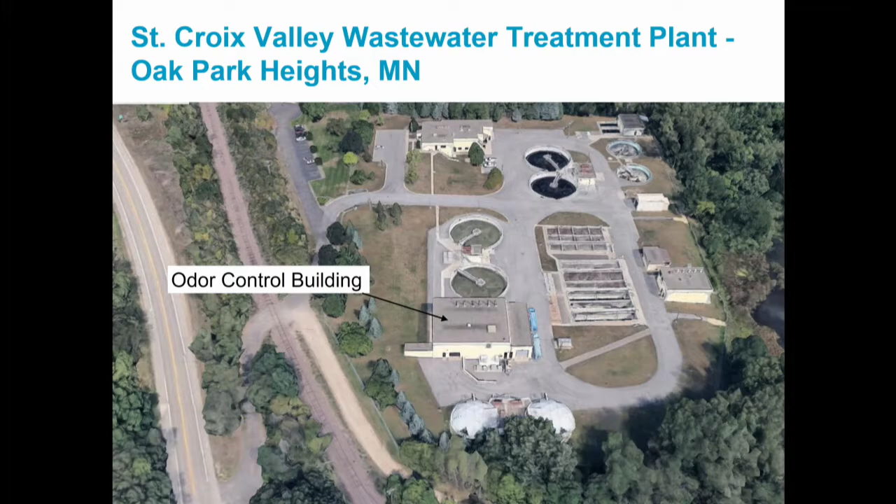A fire occurred January 7th, 2018 at the St. Croix Valley wastewater treatment plant that damaged the odor control building. Immediate cleanup and remediation to restore operability were completed on January 20th, 2018 at the cost of $375,000. This work was performed under Emergency Declaration number 2018-21.

Thank you. I wanted to illustrate some photographs before and after the cleanup. The right photograph shows the odor control fan for odor control vessel number 1 after the fire destroyed the unit. The fire actually started with this fan unit. The top left-hand photograph shows soot and fire debris right after the fire on one of the HVAC units on the second floor in the HVAC room.

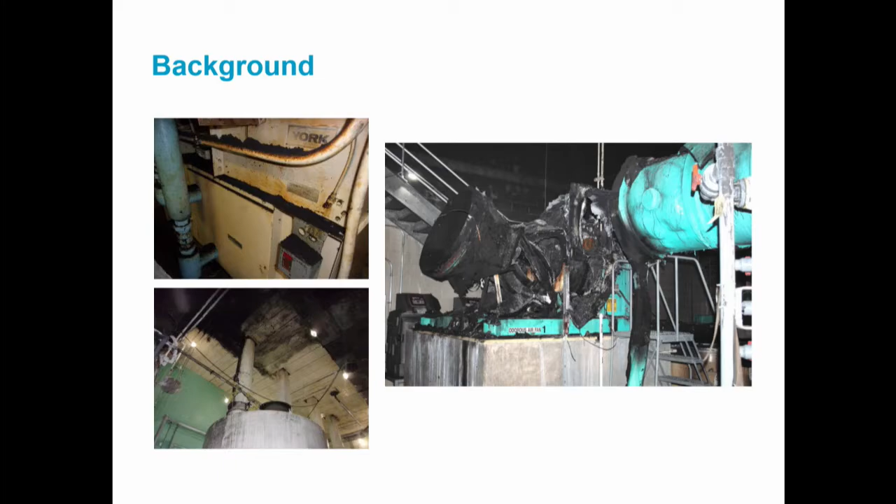The soot and debris that you see in the photograph were removed as part of the initial cleanup and remediation. The bottom left-hand photograph shows after the initial cleanup, looking towards the ceiling from the first floor looking up. Please note that the vertical walls and part of the ceiling have been cleaned as part of the emergency declaration. The part of the ceiling still covered in soot, the darker portion, will be cleaned on the permanent project after the existing electrical conduits along the ceiling have been removed. As I had previously mentioned, the fire started in odor control fan number 1.

In addition to fire and smoke and soot damage to the building, the fire traveled through the odorous air piping, causing damage to fans number 2 and number 3 and the activated carbon in all the vessels. Heat from the fire melted electrical and control wiring routed in conduits across the ceiling. Damage also occurred to critical building systems and equipment.

The work performed under the emergency declaration included restoration of temporary building systems, including lighting, power, HVAC, and fire alarm. There was immediate cleaning of floors, walls, some of the ceiling, and equipment. In addition, there was construction of a temporary odorous air header to allow for operation of 2 of the 3 odor control systems.

This second slide basically shows some more photographs illustrating a few things I wanted to point out, and I'll get to that in a minute. After the system was brought back to operability and all the initial cleanup completed, we began work on the plans and specifications for the permanent repairs to bring the building back to the pre-fire condition.

This work will include odor control vessel repair, blower fan replacements, new odorous air intake piping, and activated carbon changeout. Further, the permanent building systems will be rehabilitated, including lighting, power, HVAC, and fire alarm. And the interior building surfaces will be further cleaned and coated.

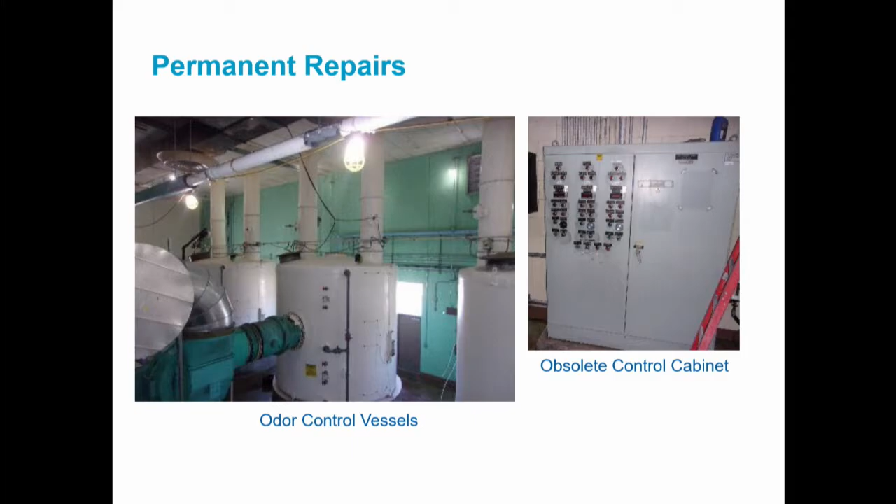As I mentioned previously, some of the ceiling still has soot on it, and we won't be able to get to that until the conduits and electrical wiring that has been damaged are removed. The other thing I wanted to point out in that photograph, if you look on the left-hand side, that looks like a semicircle. That is actually the temporary odor control header that we installed, which will be removed and the permanent one installed there.

2 proposals were received on September 12th, 2019: one from Total Mechanical Services in the amount of $2,761,131, and a second one from Pioneer Power in the amount of $2,936,669. The engineer's estimate was $2,805,034. Total Mechanical Services Incorporated was determined to have the lowest responsible bid.

The Office of Equal Opportunity reviewed and passed the apparent low bidder's good faith efforts to meet the MCUB participation goal of 9%. The MCUB participation at the time of bid was 3.47%.

The proposed action that we are asking the Environment Committee and Mr. Chair to consider is that the Metropolitan Council authorize its regional administrator to award and execute a construction contract for the St. Croix Valley Wastewater Treatment Plant Odor Control Building Fire Restoration, MCES project number 070227, contract number 19P023, with Total Mechanical Services Incorporated for their low responsible bid of $2,761,131.

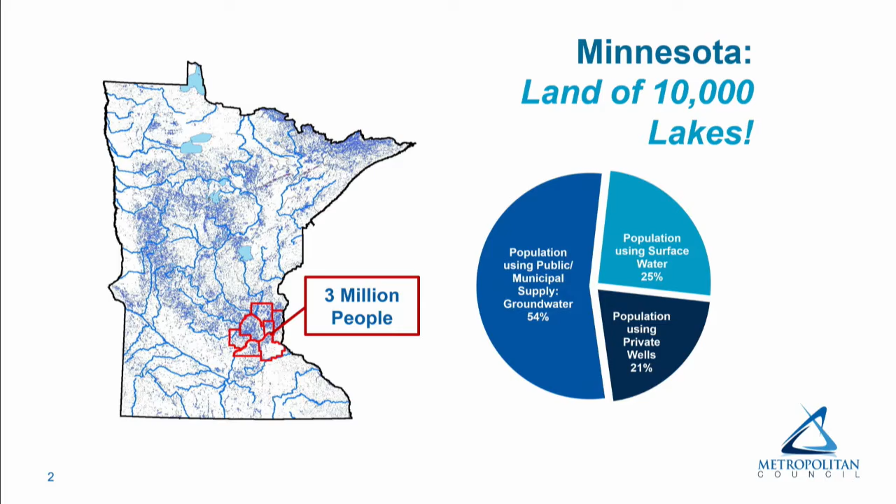With that, it's very important for us to clarify what our role and responsibility is. We are not a regulator. We're not regulating water supplies in the area. We are not a supplier either. So the Metropolitan Council's responsibility is mainly in planning for water supply in the region.

Why do we exist? This is a question many people will ask us, why the water supply planning unit exists in the metropolitan area. In 2005, responding to growing concerns about regional growth impacts on water supply, the legislature directed the Met Council to carry out planning activities addressing the water supply needs of the metropolitan area. This is in one of the documents I provided to you. You can see specific items the legislature asked the Met Council to do with regard to understanding the situation of the water supplies and planning for future sustainability of water supplies in the region. That same legislation created what we call the Metro Area Water Supply Advisory Committee.

The purpose of that committee is to assist and guide council water supply planning. Councilmember Wolf is the chair of that, starting this year. This committee has been in place since 2005. The members are representatives from counties, cities, utilities, and state agencies. It's a very good group of people who look into different issues and provide a platform for communication between all those different entities that you won't see anywhere else except in the metropolitan area.

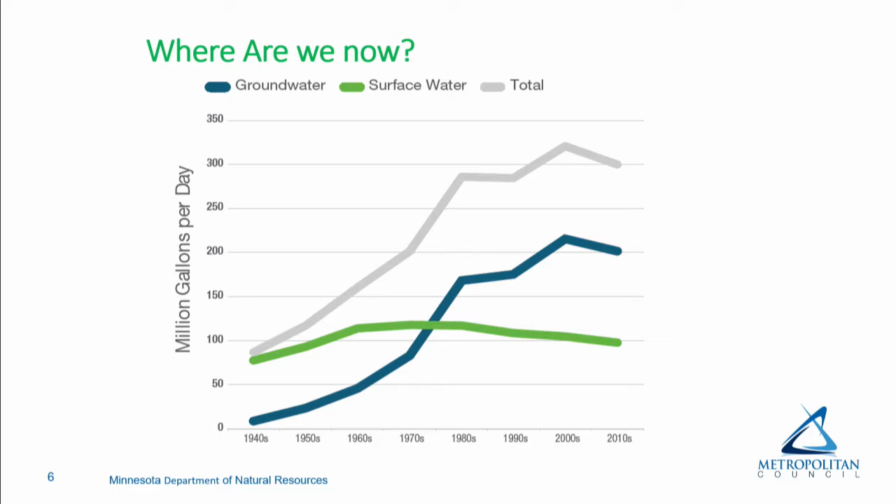In 2015, the average day water use is 300 million gallons a day for the entire metro area. But as a planning agency looking into the future, we are planning for, as an example, 2040 at this point—that's our horizon for planning.

We have started looking at how the region grows, and as projected, the region is going to grow from 3 million people in 2015 to 3.8 million people living in the area, and also adding businesses. As we develop, what will be the impact on our water resources?

We definitely saw that if we continue using water at the rates we have been using in the past, we're going to see an increase in our water use as a result of adding more people into the region. So we wanted to understand how our resources can meet that increase in demand into the future.

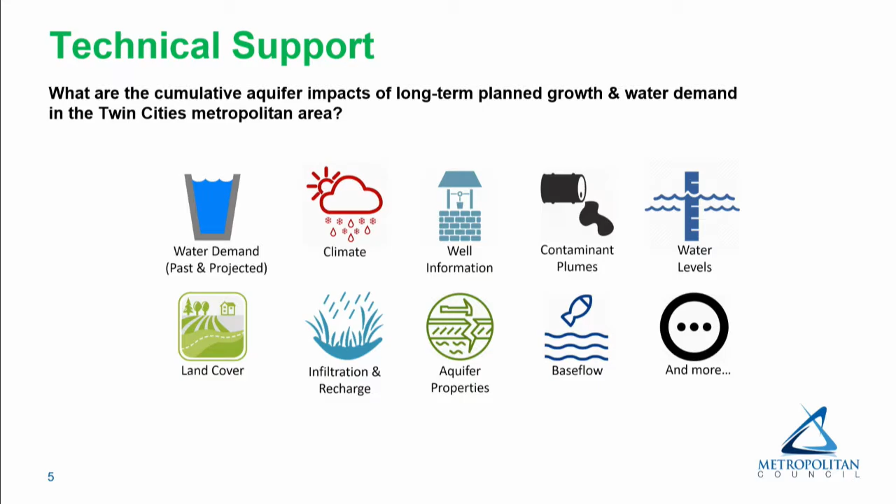One of the tools we started thinking about is how we can incorporate all this information: water quantity, water quality, water use, how we are using it, what time of year we are using more water than other times. Including all this information, we tried to develop a tool that can help us create different scenarios and evaluate the impact of growth on our aquifers.

That resulted in developing a mathematical model. We call it Metro Model 3. It's kind of our workhorse in this organization for evaluating the impact of growth in those different regions.

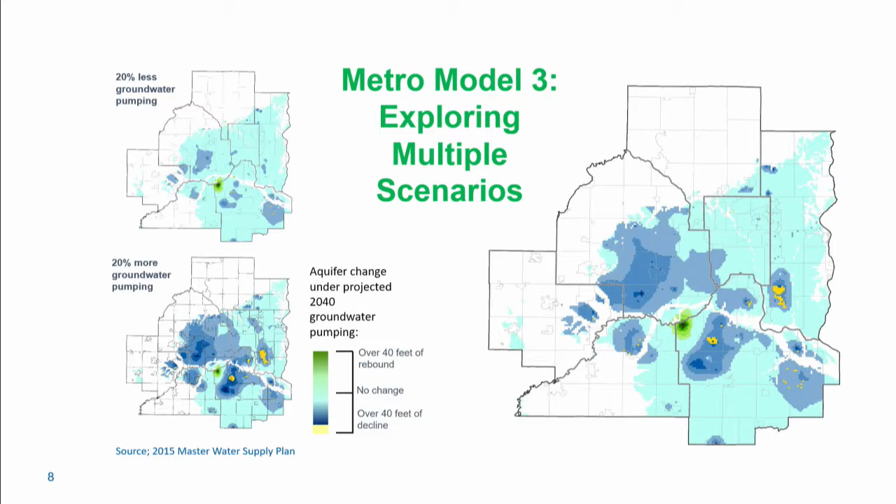These are the ranges we can plan for, from less 20% to more 20%, and come up with ideas of how we can proceed. If it goes less than 20%, we're safer, we're going to be in a sustainable future. If it goes the other way, what will be the plans for how we deal with that?

Taking all of the technical understanding of local and regional issues, and also understanding all of the complexities that I talked about, and having some of the tools that we developed over the years with the help of the communities, we developed the Master Water Supply Plan in 2010, and updated it in 2015.

The vision and goal for that plan is to have sustainable supplies for current and future generations in the region, so that water resources and water supplies are available for communities, allowing them to continue to grow and develop in the region.

The main purpose of the Master Water Supply Plan is to empower suppliers by increasing collaboration, improving their planning and implementation of plans, and providing sustainable approaches that fit their needs and local conditions so they can implement it.

It's also about protecting the source water for all of the communities in the metro area, and the water quality, and advancing water conservation and water efficiency in the region so that we can continue growing with sustainable growth in mind when developing this.

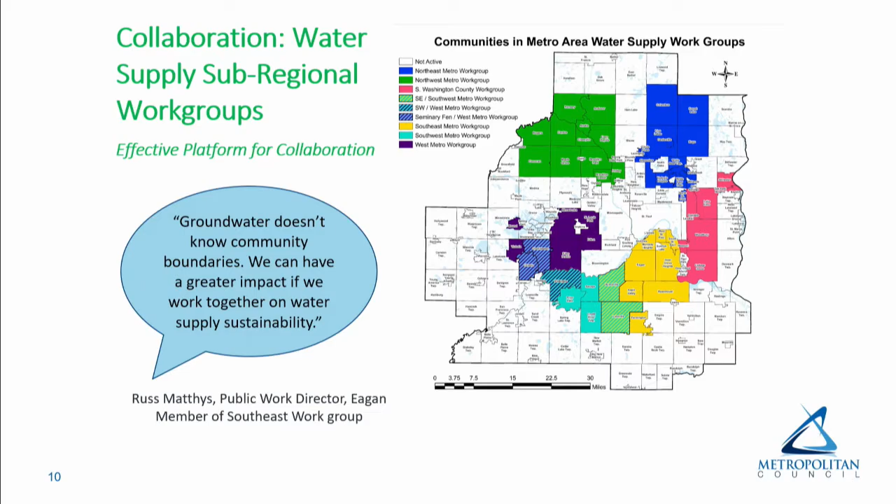Our role in those sub-regional groups became very clear from the beginning: how we can advance the collaborative effort. And it's set by the communities. The communities demanded what needed to be done in terms of our role in these sub-regional groups. We did a survey two years ago of 39 of those communities who are members of these sub-regional groups, and they asked for technical support.

Many of the communities don't have specific professionals in specific areas. For example, they don't have a geologist on their staff, but we have a geologist at the Met Council, so they started asking for help from our staff. They wanted us to facilitate meetings, help with convening, setting the agenda, and getting the group together. They also wanted Met Council to help develop messages about water stewardship at the regional level and how that could help all of these communities.

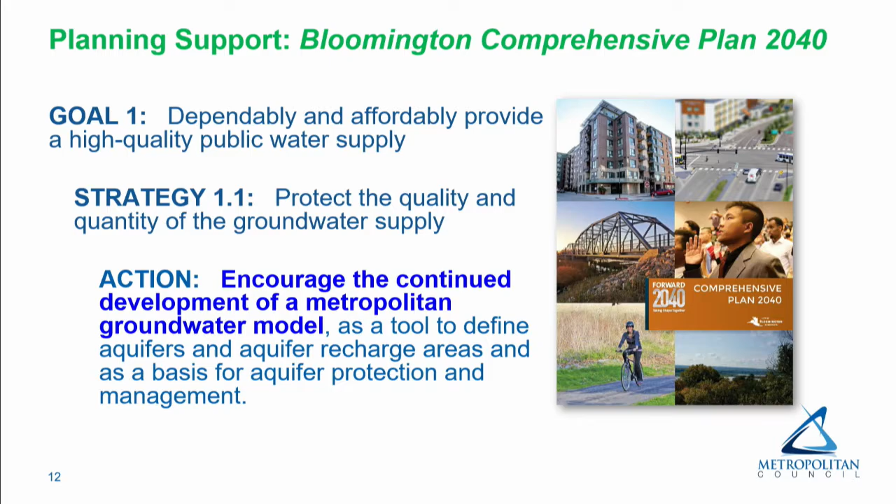It's very encouraging for us to see that this is actually reflected in the local comprehensive plan, saying they want to continue developing our groundwater model because it's a very useful tool for them. The second example I'd like to share with you is about the Woodbury Comprehensive Plan.

City of Woodbury actually reflected very well on the theme of water efficiency and water conservation. As I mentioned a few slides before, one of the desired outcomes of the master water supply plan is improved water efficiency and conservation in the region, and the regional plan helped shape local commitments about water conservation and efficiency.

City of Woodbury would like to grow by adding 20,000 people by 2040 with no increase in water use, through improvement of water efficiency. They have been doing a lot of great things, and some of their implementation plans include buying efficient irrigation controllers in bulk and selling them to homeowners at a reduced price.

If you would like to go and buy one on your own, it's $200. If you apply through City of Woodbury, you get it for $20. The city has created funding mechanisms so they can pay for this by increasing their rates. This is a significant development that has been happening in the city for the last 3 years.

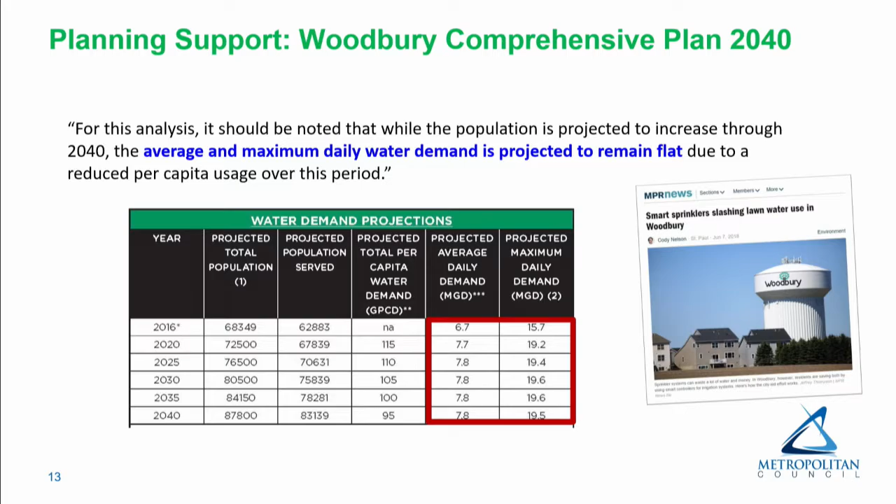The Met Council, in our water supply planning work, has been leveraging cities like Woodbury and others who want to work on water efficiency. In 2015, we created a grant program to encourage communities to reduce water use and use water efficiently. The program targets three main areas: replacing toilets, replacing washing machines, and replacing old controllers with what we call smart controllers.

The smart controllers connect to the internet and to the nearest weather station, and determine on their own that today is not a day for irrigation. As an example, like today, it will not start. This makes a big difference for us.

The program started in 2015. We received funding from the Clean Water Fund as a source to distribute to communities. We got $500,000 for two years, 2015 and 2016, and provided funding for 19 communities. Since it was a new program, communities didn't know about it, so only 19 applied.

In 2020, 2021, we got funding for this program again, $750,000. Now we have 40 communities applying, and the requested amount is $1.4 million, so it's exceeded the amount we have right now. We are going through the process of determining how much each community will receive.

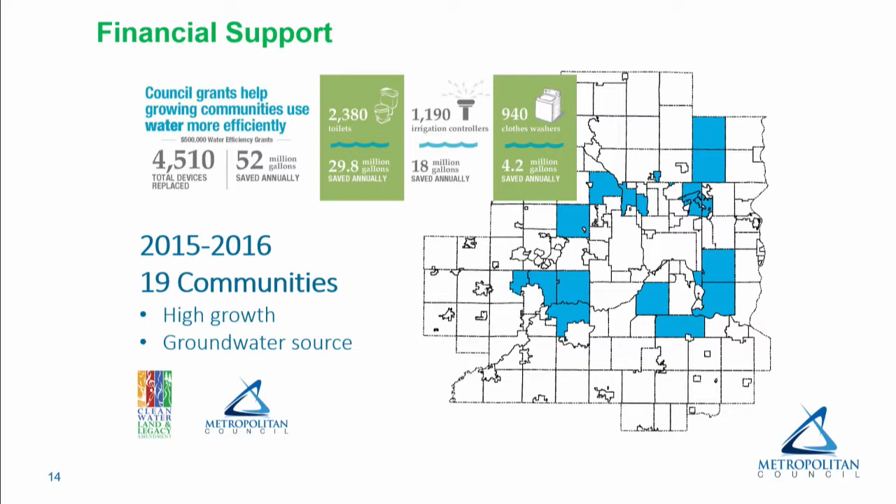Another program, set up collaboratively with the University of Minnesota, targets non-residential water use. We have a lot of industries here that use a lot of water, and many of them have their own permit from the Department of Natural Resources since they don't get water from cities — they have their own wells and pump the water, and usually they're big users.

Since the permit limit is about 1 million gallons a year or 10,000 gallons a day, you need a permit from the Department of Natural Resources. So all of those are big users and big industries in the region using a lot of water. We created this program with the Minnesota Technical Assistance Program, MnTAP.

The program sends interns from the College of Engineering at the U of M to those industries. We pay for the intern to go there, about $12,000 for each intern. The intern spends about 4 or 5 months with the industry during the summer, auditing the water use in the facility, and at the end provides recommendations: here's the problem we found, here's how you can solve it, and here's how much water you can save.

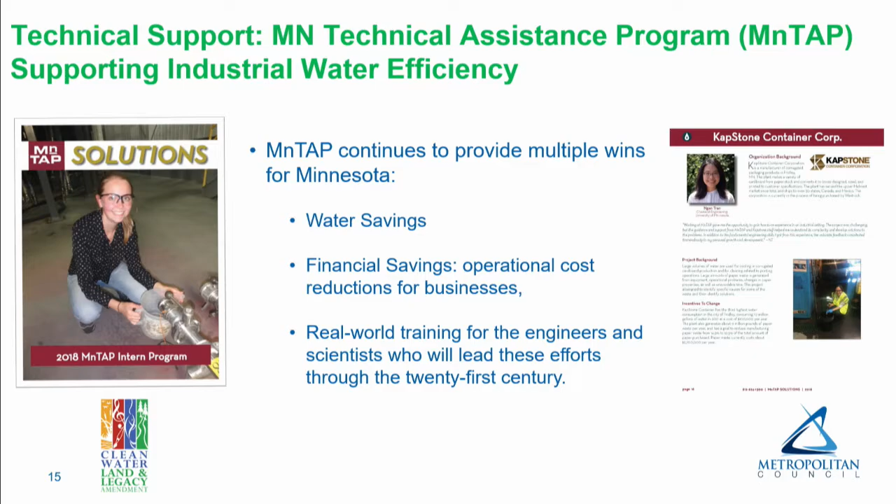There are so many factors. I'm not going to say it's only my staff's work that changed this - I'd love to take credit for all of it, but mainly we've had very wet weather in the last 5 years, which made a significant difference in the amount of water used in the summer in the metropolitan area. But there are so many other things happening too. There are a lot of efficient tools and appliances that people are using in their houses in the last 10 years, more than we saw in the previous 10 years. So there's good awareness happening in the region that we want to build on for future planning and advancement of our sustainability.

So what do we use for all of this work? As I mentioned, the metropolitan area is a big area - it's Delaware and Rhode Island together - and we have only 5 staff members. The staff members are really capable: we have 3 PhDs in the unit, 3 PEs - professional engineers - and 1 professional geologist. Out of those, 3 are engineers by training and 2 are scientists by training.

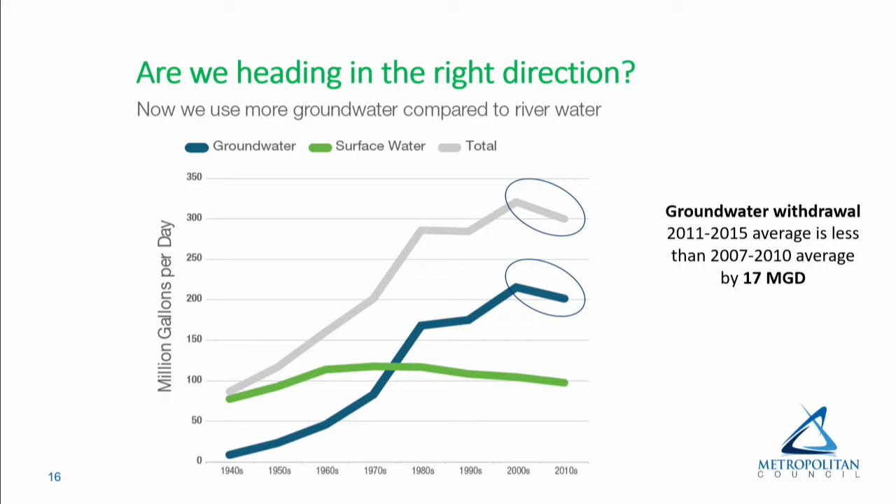Okay, good, just one more follow-up. The other one would be, when we tap the groundwater, how long does it take for the water to come back in and replenish the groundwater tables or the aquifers?

This is a very good question. Actually, we have a model that will tell us how groundwater recharge is happening in the metro area. Depending on the aquifer you are taking water from, we have 7 layers of aquifers, and I wish I had the slide that showed the different layers of the water where we are taking water from. The main aquifer that provides water for many of the communities, I would say 65% of the communities in the metro area, is called the Prairie du Chien aquifer. The recharge time for that aquifer is between 50 and 100 years.

The deepest aquifer in the metro area also exists for many of the communities. These are the different aquifers that we see in the metro area. The Mount Simon Hinckley aquifer takes 10,000 years to recharge. It's very interesting that most of the recharge areas for the Mount Simon Hinckley exist outside of the metro area, in Wright County and neighboring counties, mostly to the west of the metro area.